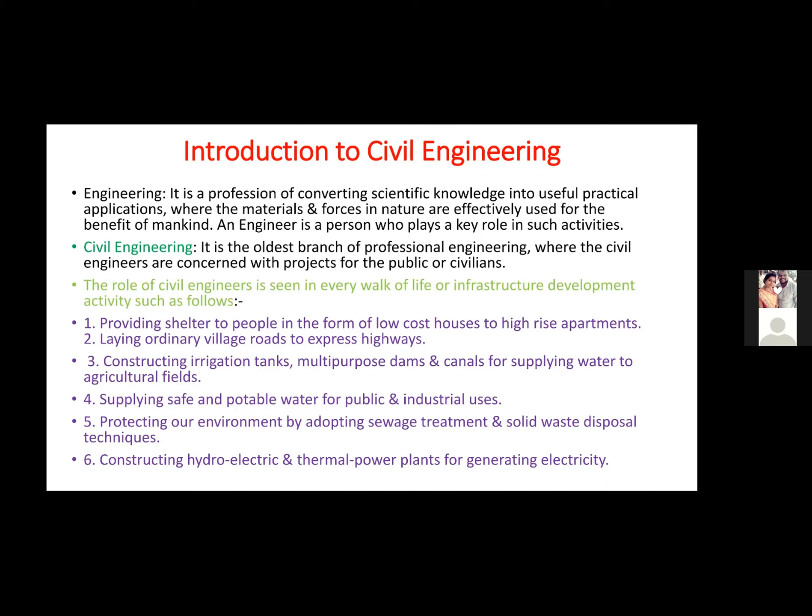Then constructing hydroelectric power and thermal power plants for electric generation. These things are considered by civil engineers. Providing other means of transportation such as railway, harbour, and airport.

Airport, of course, the takeoff and landing of the aeroplane takes place. The platform is done by civil engineers, that we call the runways, and that on which the movement of the aeroplane takes place is also done by a civil engineer. Construction of airport, of course, we the civil engineers are concerned with.

Then eight, constructing bridges across streams, rivers, and all across the seas. Nowadays, civil engineers are accepting challenges to construct tunnels under the water. You can just Google a keyword and you will get plenty of examples of tunnels constructed beneath the water, across the mountain.

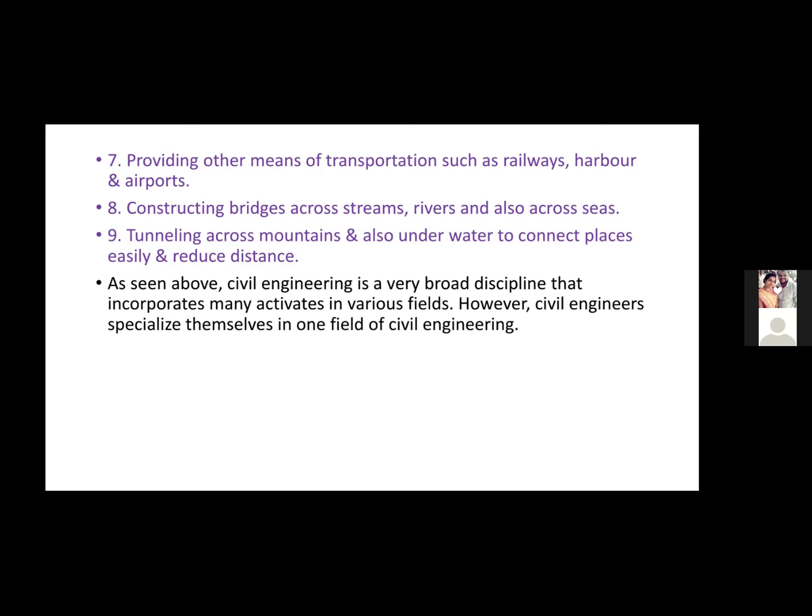As seen above, civil engineering is a very broad discipline that incorporates many activities in various fields. However, civil engineers specialize themselves in one field of civil engineering. So let us discuss - we have 7 to 8 different branches of civil engineering. We'll go one by one.

First is surveying. It is the science and art of determining the relative position of points on the Earth's surface by measuring distance, direction, or vertical heights, directly or indirectly. Here I mean to say that if you have a ground, it will be undulated, something like this.

Okay, the ground will be undulated, something like this. Now, with the help of a survey instrument mounted like this, which has a telescope, we calculate this height. So by this, we come to know how much has to be cut and how much has to be filled.

For example, if I want to make this ground flat, here I need to put some soil. This portion has to be cut and this portion has to be filled. By calculating the relative position of the object on the ground, we come to know how much has to be filled and how much has to be cut. This is the process we carry out in surveying while doing roads and all.

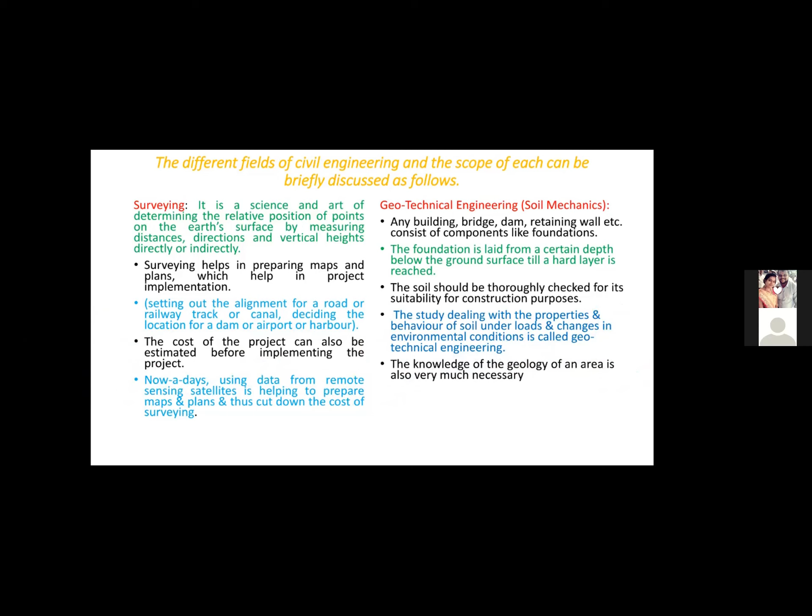The cost of the project can also be estimated before the implementation of the project. Once the drawing is done after the surveying, by measuring land length and width, we can estimate the cost required to construct the particular building. That can be done by surveying.

Nowadays, using data from remote sensing satellites helps to prepare maps. Now we can make use of GPS. You will be using Google Maps - how does it work on GPS? By sitting at one place, we can see how the roads are aligned in different localities. That is how, nowadays, we are advanced with the technology.

Next branch of engineering is geotechnical engineering. It is sometimes also called soil mechanics. You might have understood what exactly geotechnical engineers do. Here we study the mechanics of the soil strata, because it is very important that the entire weight of the building has to be borne by the earth beneath, since the entire load will be transferred to the earth. That is why it's very important.

First and foremost important, the foundation lays for a certain depth below the ground surface till a hard layer is reached. Unless and until we get a hard strata, we keep on digging the earth to lay the foundation. The soil should be thoroughly checked for its suitability for construction purposes - we have to check the safe bearing capacity, by which we come to know the load carrying capacity of a particular soil.

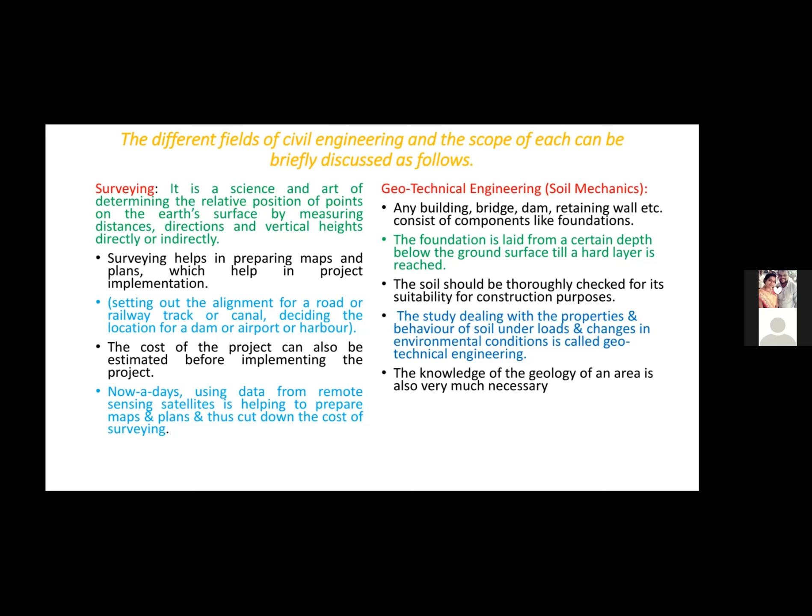And one more thing is that as we keep digging along, if we won't get hard strata, then in that case we can increase the depth of the foundation, by which we can overcome the situation. Next is structural engineering.

A building or a bridge or a dam consists of various elements like foundation, column, beam, slab, etc.

This all will be designed by the civil engineer. Design is nothing but giving a cross section for this particular element, which is purely based on the load coming over it.

These components are always subject to forces. It becomes very important to determine the magnitude, direction and nature of the forces acting all the time on the building. Based on the stress developed due to the loading acting on it, bending moment will develop in each and every element, such as columns, beams, slabs, etc.

The bending will take place based on the bending moment, which will provide the cross section, giving the shape, breadth and depth. Based on that cross section, the amount of steel to be added, the spacing of the steel bars, diameter of the steel bars, where it has to be cut, how it has to be laid, everything, the detailing of each and every component will be given by the structural engineer.

Nowadays it is a trend that everyone wants different shaped housing in their locality. Everyone wants their elevation to be different from others. Giving a shape is very easy, and that is done by the architecture people. To make it withstand in reality, this is where the structural engineer comes into picture.

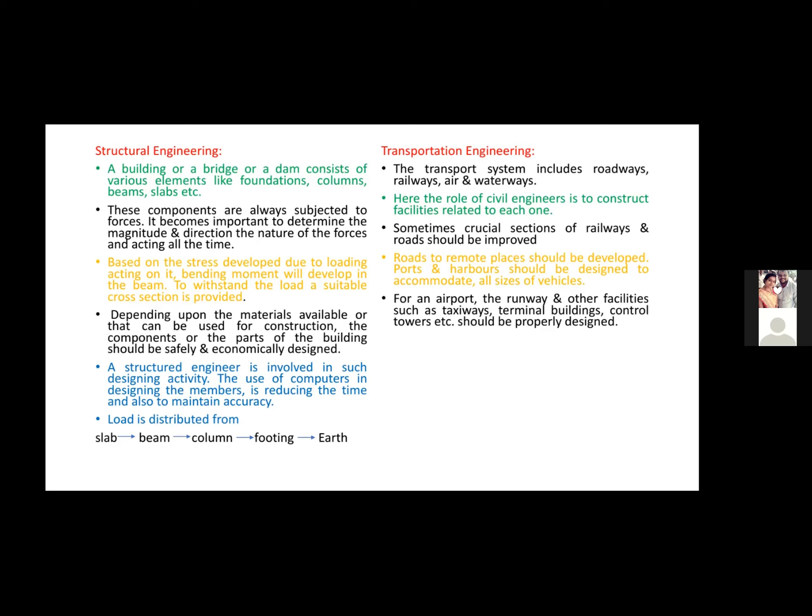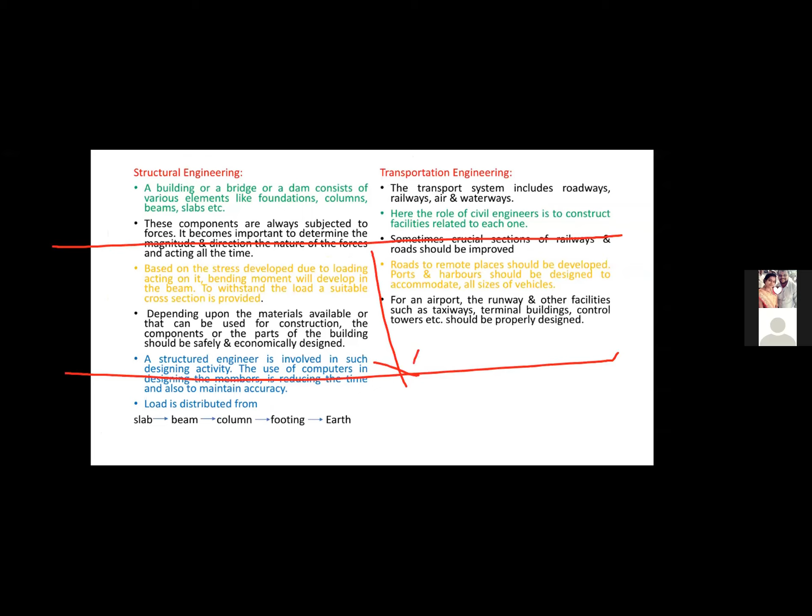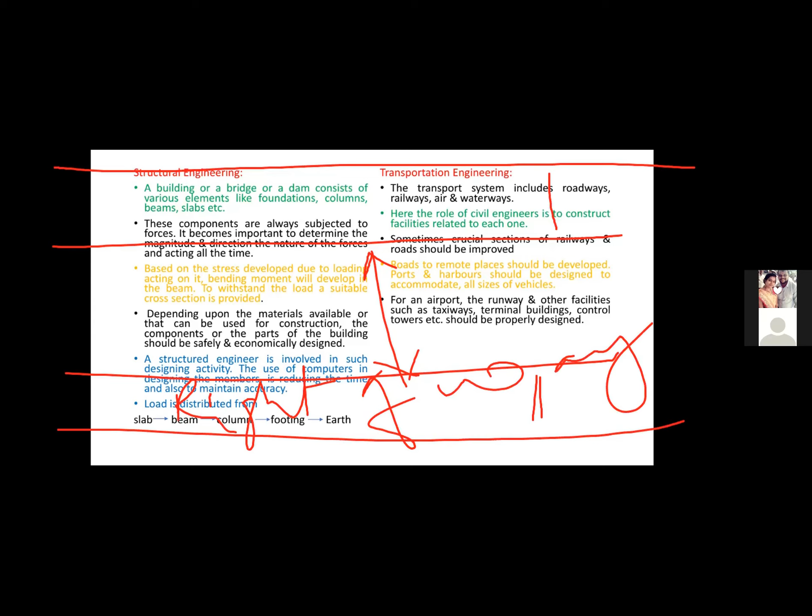Now, one more thing in transportation engineering: we reserve some land on either side of the road throughout its length, which we call right of way. For example, if this is the width of the road already constructed, we acquire some land on either side of it. This land is reserved for future expansion. This is called right of way - the land acquired on either side of the road for future expansion.

For example, most of us are from Bidar, Humnabad, and Basavakalyan. I'll take an example: when I moved from Basavakalyan to Humnabad, for widening of the road, demolition of buildings took place because they had not acquired land for future expansion. This should not happen. Whenever we lay any road, we have to think of the future, at least 2-3 decades, and design the roads accordingly.

Now, I told you we can classify roads based on materials as well. So based on material, we have 4 different categories of road. The first one is earthen road, purely of soil.

The second category of road is water bound macadam. This water bound macadam road is a somewhat improvised version of the earthen road - macadam is named after a Scottish engineer, John McAdam, who introduced this road, so it's called water bound macadam. What he did is add broken stone and soil, then sprinkled water and compacted it, which increased the life of the earthen road. But after this, the life remains for only one season - once the monsoon comes, it will vanish again due to the monsoon.

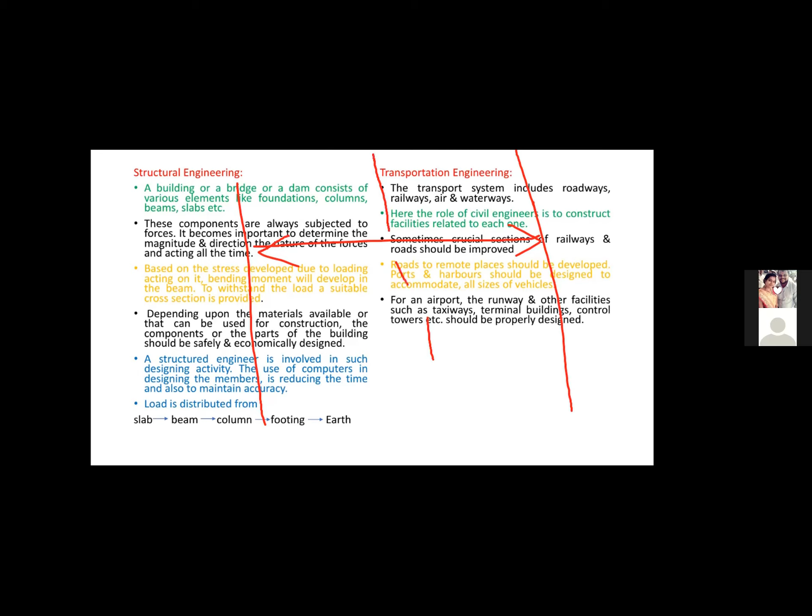Now, 3 more points I want to highlight. If you have a road, for example, this is the road width - this is called pavement, I'm talking about black top color. After this pavement, in the center we have a marking like this, a dotted line. After this dotted line, at the end we have marking on either side of the road - this width is called the shoulder.

This width I've shaded here is called the shoulder, and this shoulder has to be used for emergency parking. For example, if your vehicle is moving here and due to movement something goes wrong with your vehicle, we should not park here itself. We have a habit of parking here and closing off the area with stones - this should not be done. The vehicle has to be taken to the shoulder and parked there, because the shoulder is known for emergency parking. The shoulder is provided for emergency parking.

Okay, as I told you, the black top width is called pavement. Then comes the speed breaker.

Speed breaker is nothing but humps. Humps have to be designed so that the shock produced when the vehicle moves on the humps should not be felt by the person sitting inside. For this, we have to give some gentle slope on either side. Speed has to be restricted, but the shock should not be felt by the person. We have to keep this in mind while providing the humps.

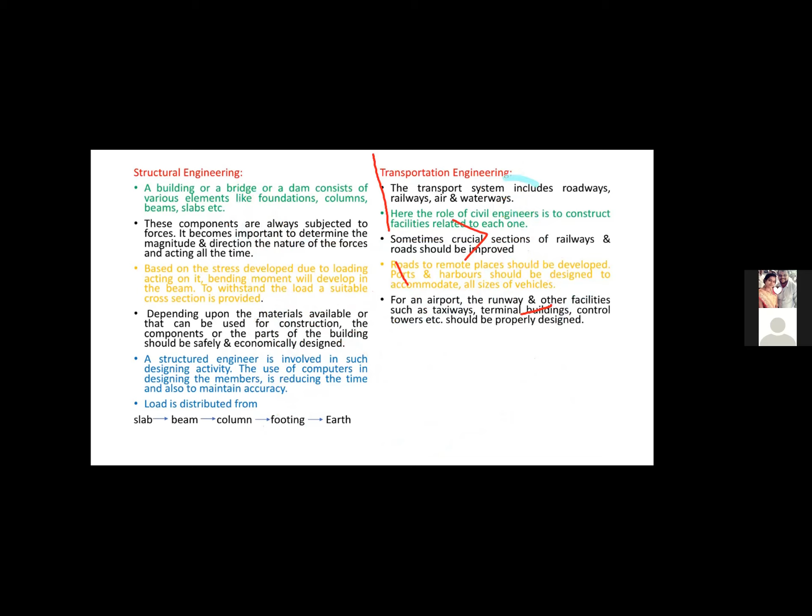Next comes irrigation and water resource engineering. Irrigation is a process of supplying water by artificial means to agricultural fields for raising the crops.

To achieve this, we would require some canals, regulators, aqueducts, weirs, barrage, etc. to convey the water from the dams to the agriculture. Since rainfall is inadequate, insufficient or unpredictable in an area, the water flowing in a river can be stored by constructing a dam and diverting the water into canals to convey to the agriculture. This can also be done.

Hydroelectric power generation facilities are also included under this aspect. What exactly do irrigation people do? They identify the source where water can be stored. The stored water, whenever there is a famine condition, when there is no monsoon, that water can be drawn and conveyed to the agriculture field by means of canals and all. This can be done.

Now, hydraulic engineering. Hydraulics is a branch of science and engineering concerned with the mechanical properties of fluids, particularly with reference to water.

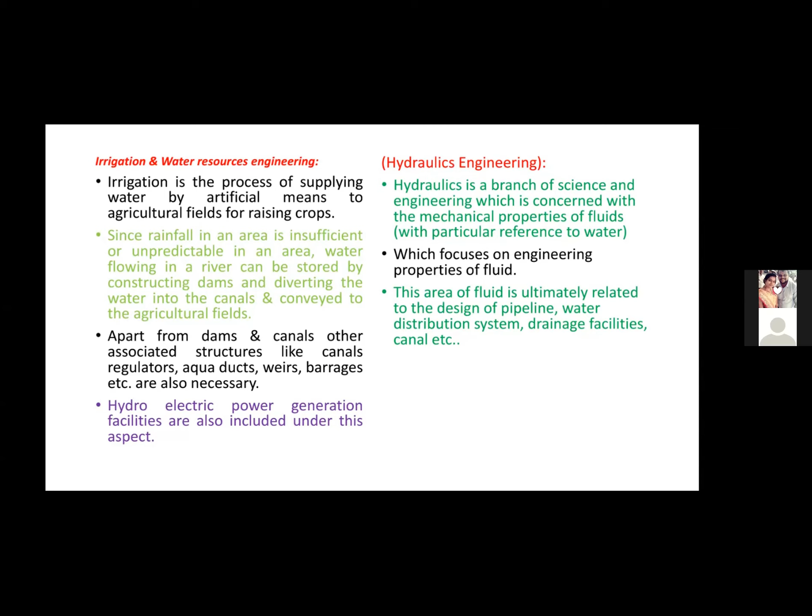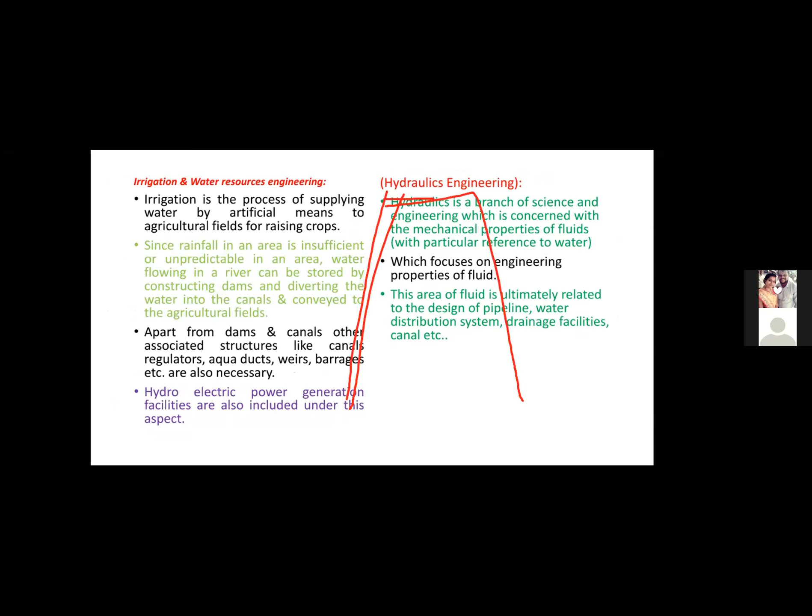What I mean to say is, if you have a bund, on this side our water level is there, standing water. Now the pressure created on this bund will differ from place to place. The maximum pressure will be at the center, at one-third. When we measure at this point, the pressure will be maximum. From the base, at a distance of one-third, the pressure will be maximum on this bund.

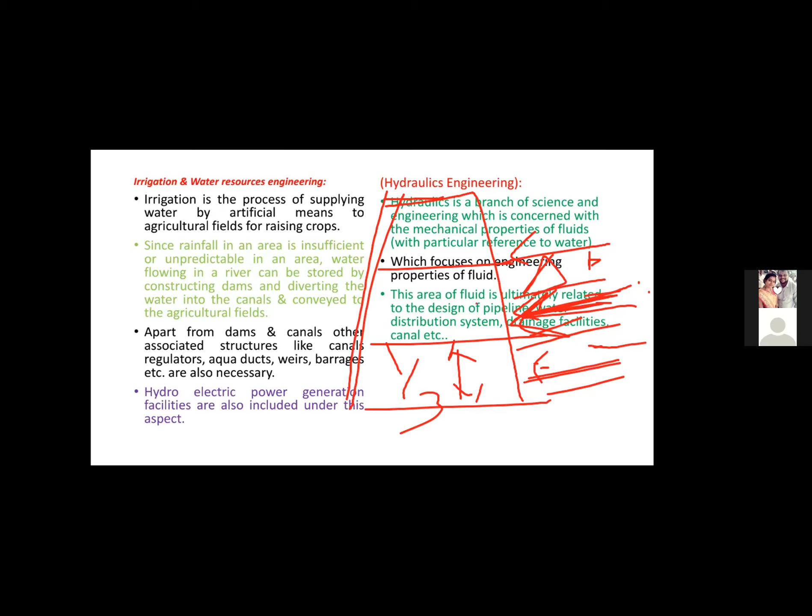For example, in this hydraulics we calculate the water properties, the mechanical properties of water. What are the mechanical properties of water? These are engineering properties like specific gravity, pressure, density, viscosity. These are all the properties required to design, for example, pipelines, water distribution systems, drainage systems, canals, etc.

Now I'll give one simple example. In day-to-day life, we see the whistle mounted on a pressure cooker. At a particular pressure created inside the cooker, the whistle will move up and blow. Once the pressure is released, it will come back. Here the thing we have to understand is that the whistle will lift at a particular pressure created, so its weight is very important.

To decide this, hydraulics plays a very important role. The thickness of the pipe has to be designed so that if the pressure is more, it should not crack during the supply of water. When we draw water from some source, the diameter of the pipe will be different from source to destination, so that only we can get the water with high pressure, or else we cannot. This is all we study in hydraulics.

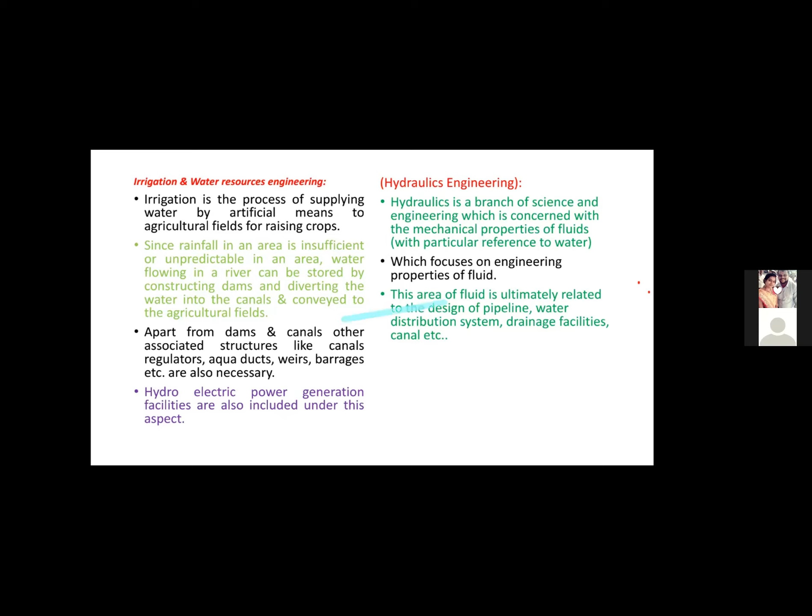Next we have water supply and sanitary engineering, which we call environmental engineering. Under environmental engineering we have two things to study: water supply and sanitary engineering. Water supply is for potable water, and sanitary engineering is for the water which is used, that water also we have to treat before releasing it to any water bodies.

For example, people in every village, town, city need potable water. The water available on the surface, in the form of surface water and groundwater, may not be fit for direct consumption. Now environmental engineers check whether the minerals present in the water are fit for drinking or not, whether they are in the required proportion or not, because everything has to be maintained in a certain proper ratio, and that has to be ensured first.

In such an area, the water should be purified and then supplied to the public. For water purification, sedimentation tanks, filter beds, etc. should be designed.

If we require water in a large quantity, then we have to go for a treatment plant, where we come across sedimentation tanks and filter beds. If the treatment plant is far away from the town or city, a suitable pipeline for conveying and distributing water should also be designed, since we have to draw the water from that source to the locality. So a distribution system is required.

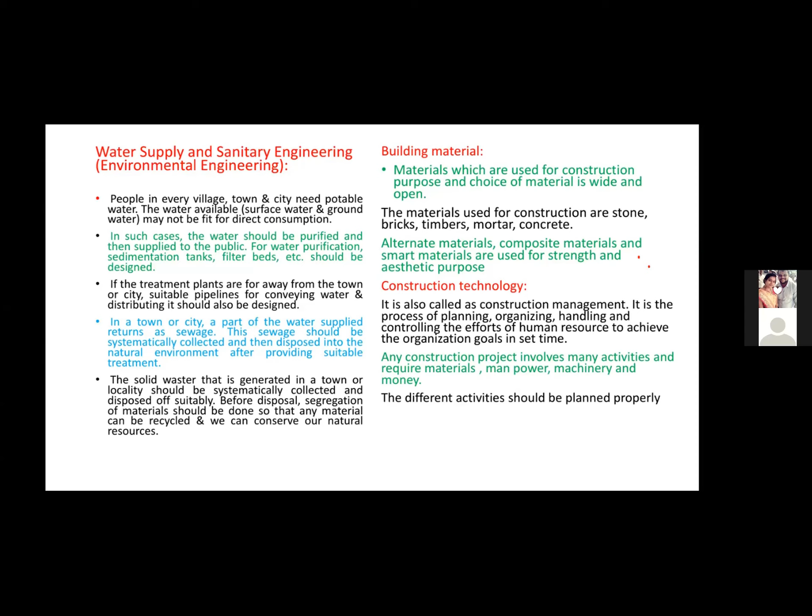Then we have construction technology, also called construction management. It is the process of planning, organizing, handling, and controlling the effort of human resources to achieve the organization's goals in a certain time. For a huge mega structure, the material and manpower requirements are too large, where managing materials and human resources plays a very important role. Any construction project involves many activities and requires materials, manpower, machinery, and money. The different activities should be planned properly so that we can finish it off in a set time.

Next comes infrastructure. Any mega structure or big structure can be called infrastructure. Economic development of a country depends on the growth and production rate of industries and agriculture. In other words, infrastructure may be defined as a facility to be provided by the state, central government, or local administration for the overall development of the country. Here I have given some roles of civil engineering in infrastructure development, with civil engineers involved in town and city planning.

In town and city planning, we have to locate some areas which should be easily accessible for all the people living in the locality. The components include hospitals, water treatment plants, and gardens. People have to live in a city, and the place should be feasible for everyone to move around. Then there's building tanks and dams to exploit water resources.

Water purifying plants at needy areas such as houses, schools, offices. Then provide drainage system, and provide and maintain communication systems like road, railway, harbor, and airport. These roads, railway, harbor, and airport are also considered infrastructure because constructing these things requires many days.

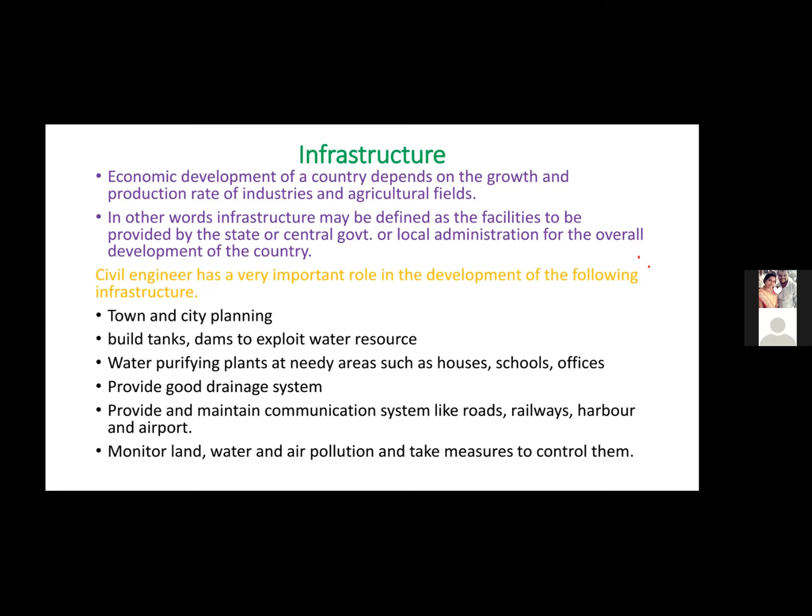We have to monitor land, water, and air pollution and take measures to control them. Now let's see some of the effects of infrastructure development on socio-economic development. Large scale budget provision by the government on infrastructure facilities makes way for rapid industrial expansion and agriculture development. This development leads to employment, reduction of poverty, and improvement in per capita income.

Consequently, rural people involved in agriculture move towards urban areas for their livelihood. This has serious impact on agriculture. The other effects are urban congestion, shortage of housing facilities, pollution, and development of slums.

Infrastructure development is better utilized by the high income people group.

Some ill effects of infrastructure development are listed below. Exploitation of natural resources can lead to environmental disasters. If more infrastructure is required, we cut off forest areas, which leads to environmental disaster as the temperature will increase. Then birds and animals migrate from place to place, and ecology cannot be balanced if you do so.

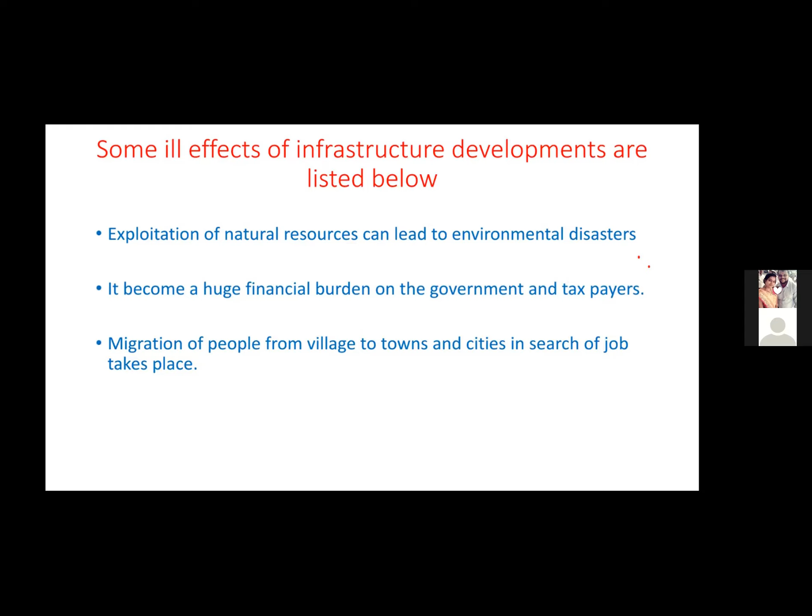Migration of people from villages to towns and cities in search of jobs will take place. More the infrastructure, job facilities will be more, and no one will want to work in the agriculture field. They come to urban areas in search of jobs. This is going to happen.

Now apart from this, as I told you, in material testing, I wanted to discuss building materials. I wanted to tell you some hints by which we can test the materials. For example, if someone asks you to check the cement, what exactly do we do? No idea? So I will let you know.

Just put your palm in your freshly opened cement bag. If the cement gives a cool feeling, then you can say that is a good quality of cement. Bad quality or expired cement will give a hot feeling. Yes, we do have a certain expiry date for cements. The manufactured cement packed in a bag has to be used within 6 months. After 6 months, if you have any bag, it has to go back to the retailer, because it will not give strength like freshly prepared cement.

Second thing, take a pinch of cement and feel it between your fingers. It should feel like a powder, like talc you apply on your face. The micron size of the cement is 90 microns, so it will disappear when you feel it between your fingers. That is the second step. Then you can see the color. If it is greenish gray, then it is a good quality of cement.